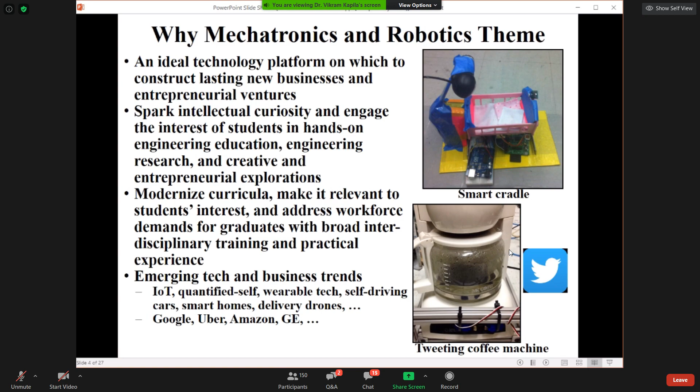It can address the demand for a workforce that produces graduates with broad interdisciplinary education and practical experiences. And then obviously there are numerous emerging trends, maker spaces that are becoming commonplace in all kinds of businesses that see the potential for mechatronics and robotics.

So in response, within the last 4 years, starting in about 2016, we have created a new master's in mechatronics and robotics that has 4 foundational courses in mechatronics, robotics, and software tools. It also includes a course in entrepreneurship. Additionally, students can specialize either in robot mobility or in medical robotics. We have not yet done the micro robotics option, although that is in the curriculum.

And then there is a thriving ecosystem that we have built to support projects and theses for students. And hot off the press is our brand new undergraduate interdisciplinary minor in robotics that our 4 recent robotics hires have created that is going to be offered starting in fall of 2020.

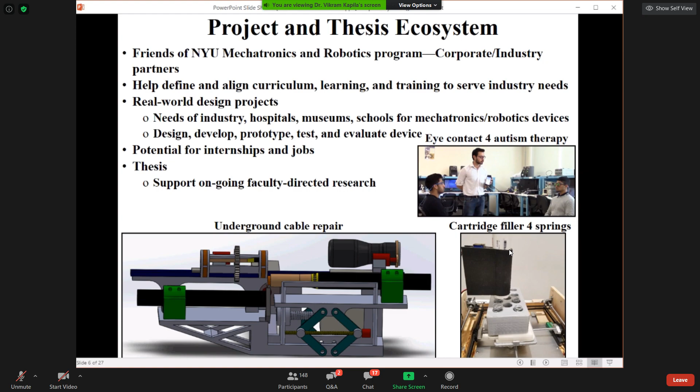So we have a very thriving project ecosystem where companies can come in, partner with us through the Friends of NYU Mechatronics and Robotics program to shape the curriculum, provide internships and jobs for these graduates.

Now let me discuss a little bit about our work on natural and intuitive human-robot interaction with mobile devices. There are two main methods that we utilize to create these HRI techniques. In one approach, the smartphone could be mounted on the test bed, whereas in the second approach, the smartphone or tablet could be held in the user's hand.

To render these novel human-robot interaction solutions, we adopt research results from varied domains, including user interaction research, machine vision research, 3D graphics, as well as estimation and control, to develop solutions for a variety of problems.

We have applied these techniques to develop highly interactive lab explorations for automatic control and mechatronics. Some of these setups could be controlled locally with students present in the lab, creating a highly enriching learning environment. But in others, the test beds could be accessed remotely, and we have published extensively in this area.

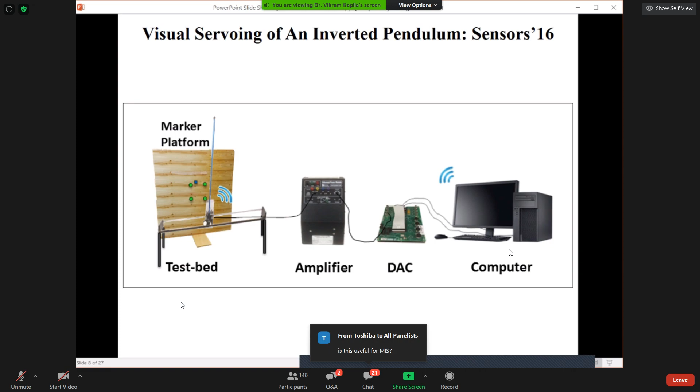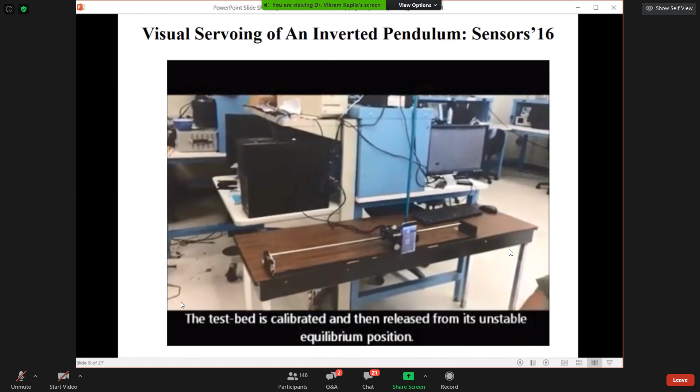So the smartphone is embedded here on the inverted pendulum test bed. All of the sensors on the pendulum test bed are not being used. Instead, we are simply using visual servoing with the smartphone and implementing the control algorithm directly on the smartphone to be able to control the inverted pendulum vertically upright.

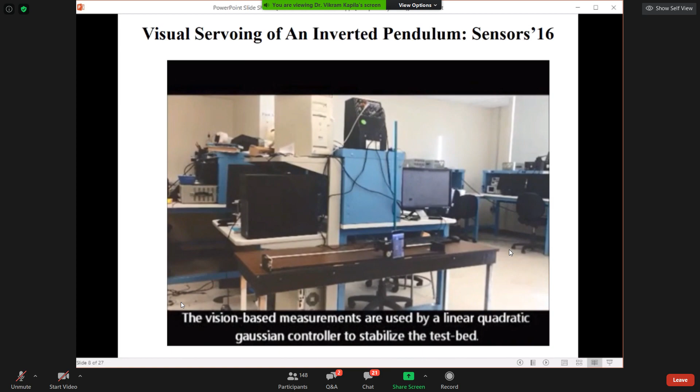So now let me transition to our more recent work that is looking at convergence research. I'm going to discuss some of this work that we have done over the last 4 years. It's mostly driven by the realization that our world is witnessing several frontier technologies that are evolving at a rapid pace.

There are several novel drivers in the current tech ecosystem that render these frontier technologies to the level of being considered as disruptive technology. Finally, I'll also look at some of the ongoing research at the convergence of frontier technology in my lab.

Industries that are having difficulties filling jobs with human workers are increasingly deploying robotics to stay competitive. Hirebotics is one such company. I read about them only about 2 years ago in a Washington Post article, and a few months later, one of my students was hired by them. Essentially, it's a robot staffing company that you can call in to deploy robots for an industrial problem without having to pay for the robot. Instead, the robot is essentially being paid for on an hourly basis.

Similarly, artificial intelligence is being deployed extensively now for applications such as policing, mortgage application processing, social media campaigns, and autonomous driving. AI and computer vision are becoming extremely common in a wide variety of applications.

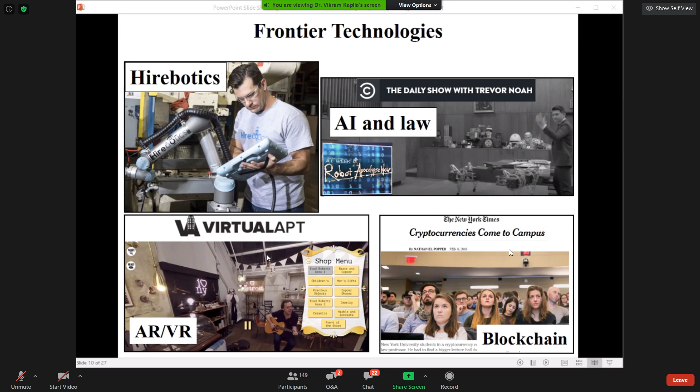Blockchain technology similarly has pretty broad applications beyond serving as a distributed, decentralized, secure contract for cryptocurrency, and we have been using this in recent years for swarm robotic applications in our lab.

So the drivers for disruptive technology emerge from the fact that there have been advances in tech frontiers in recent years that have allowed a number of these hardware and software technologies to be democratized, so that access to hardware, software, as well as knowledge has become very commonplace.

What used to require maybe 20 years ago tens or hundreds of thousands of dollars to do new development in the robotics field now could be done in one's garage with basically hardware and software all acquired off the shelf for hundreds or perhaps low thousands of dollars.

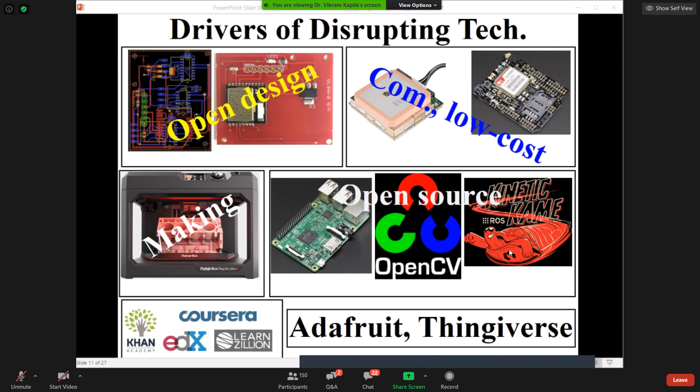And then there has been an evolving culture of making, inventing, and startups that is adding more fuel to propel this disruption rapidly. So now let me look at a couple of these examples from my lab, specifically robotics, AI, augmented and virtual reality, and blockchain.

Many of these technologies are converging together, and their greatest applications are going to come from interactions amongst them instead of in their silos. So in our lab, we are exploring some of these technologies and how their integration can be beneficial.

For example, how you might be able to integrate AR and VR with robotics, and how you might be able to use blockchain in swarm robotics to do secure messaging and communication across multiple entities.

In the interest of time, I'm going to focus primarily on augmented reality for human-robot interaction, where our goal is to create a highly effective intermediary between robots and humans so that they can exchange information and allow novice users to interact with robots in a shared space without requiring any specialized training.

In one such scenario, humans can inform robots in a natural and intuitive manner that results in the desired motion of the robot and allows its end effector to reach a desired target. Moreover, the robot can convey requisite information to the user, for example, the workspace boundary in which the robot can operate.

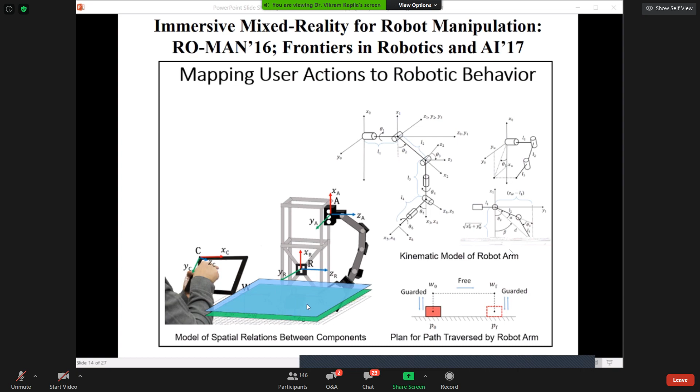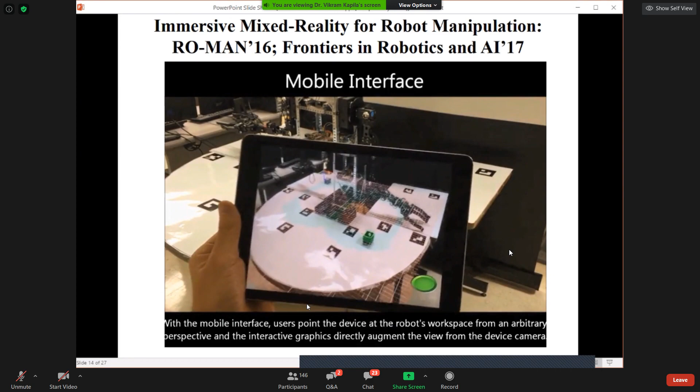In this first setup, the video that I'm going to play, you are going to see a robot manipulator that is going to be controlled through a tablet-based interface. The user is holding this tablet with a user interface already loaded on it, and then the objects and the environment have a number of fiducial markers installed on them.

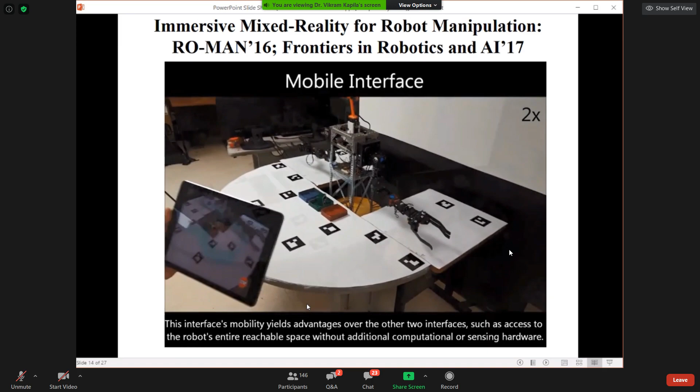The human user is able to move around freely in the environment and interact with the environment and the user through the UI to command the robot to pick and place various objects. The tablet camera is being used to sense the environment.

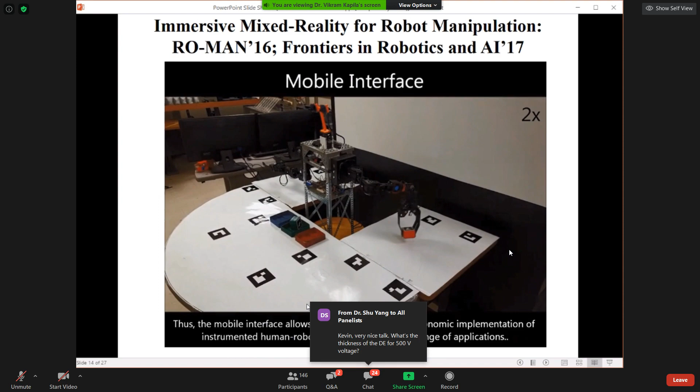Fiducial markers are the ones that are being used to locate the objects, and then there are homography algorithms running in the background to allow the robot and the objects to be located in the environment.

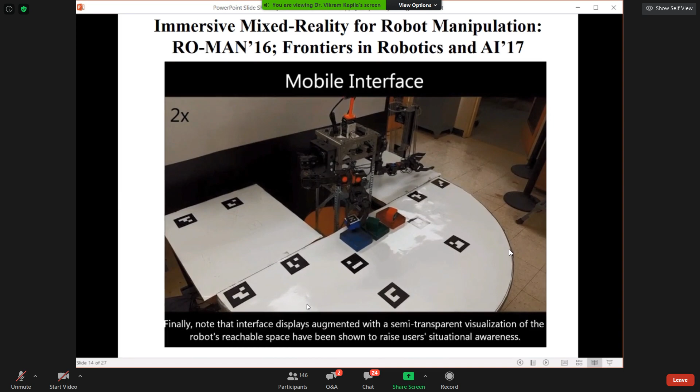This is about 4-year-old work, and you will see the progression of this work as to how we will be able to remove a lot of these fiducial markers from the environment and still be able to interact with the robot and the environment. So in this next piece of work, we are moving away from one manipulator robot.

Instead, we're working with a number of mobile robots in the environment that can all be interacted with and commanded through the tablet.

Once again, you will see in the video that we are using fiducial markers that are placed on the robots as well as on the objects. But now, at any given instance, only one fiducial marker affixed object has to be stationary, and that object can change from moment to moment, and that is where momentarily we affix a coordinate frame.

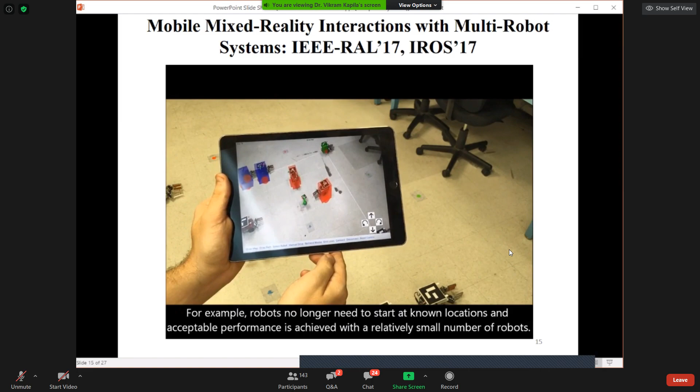A lot of the other information for the homography comes from measuring the sensor information from the tablet itself, the IMU of the tablet, and multiple robots could be interacting with the objects through that single tablet. You don't need to put any cameras in the environment. You don't need to put any sensors. The environment is not prepped up.

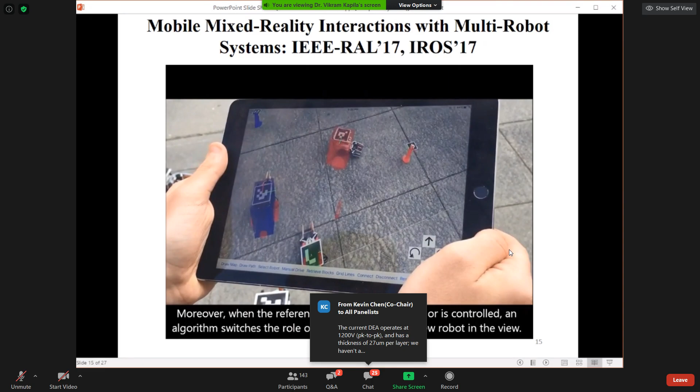So now all these robots and objects have been brought outdoors, and just with the tablet, you're able to locate, visualize, and interact with these objects. But once again, like the previous video you saw, all the objects and the robots here do have to have the fiducial marker.

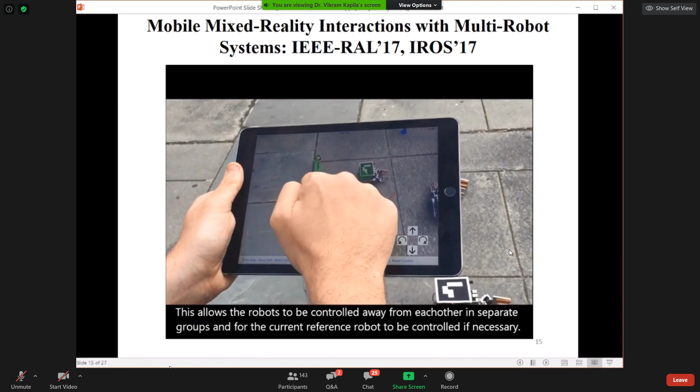So now let's start relaxing some of these assumptions that we had previously. In this new framework, what we are going to do is marry the marker-based technique that you saw previously, but instead of having numerous markers on the environment, objects, or the robot, in this new scenario, there would be a single fiducial marker that will be placed in the vicinity of the robot to localize that robot.

And then beyond that, we will be using markerless approaches that will allow us to determine patterns that belong to individual surfaces so that we are able to locate the surface of operation where the robot is going to be picking and placing the objects.

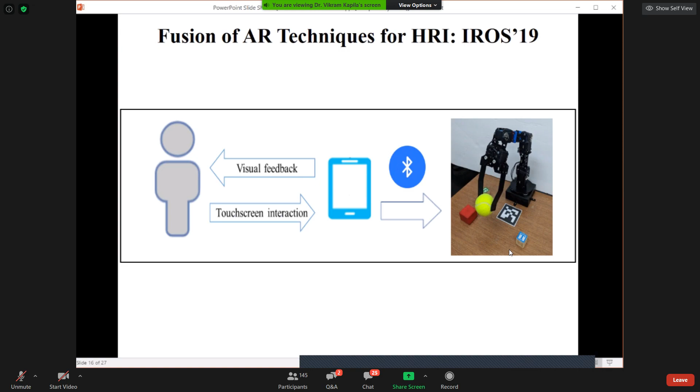Using ray casting methods, objects are located through user interaction on the screen, both for pickup and placement. The human user holds a smartphone through which they locate the fiducial marker where the coordinate frame is located. As the user moves around using the IMU on the smartphone, the coordinate frame affixed to the fiducial marker is recalled, and the user drops anchors based on where the interaction needs to be done, as you will see in this video.

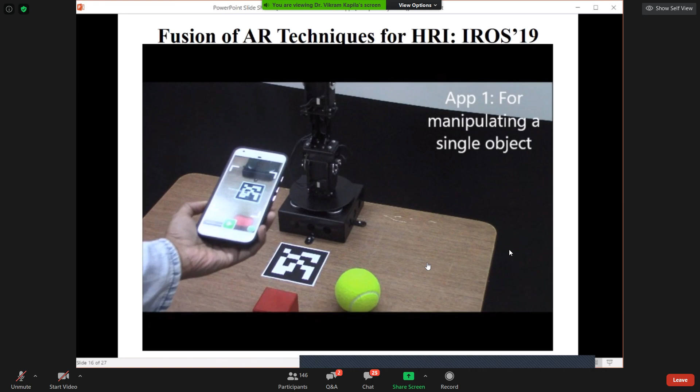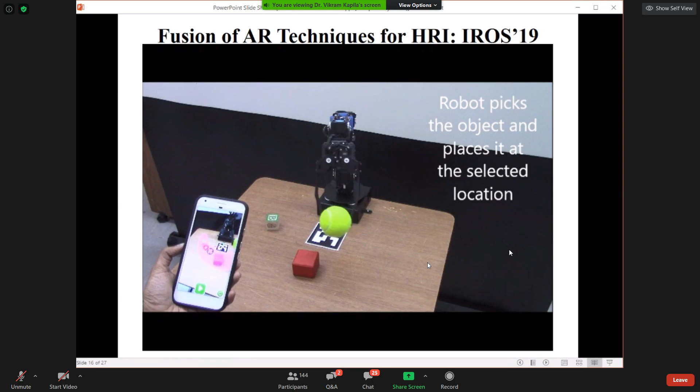The user first places the origin on the fiducial marker, then puts anchors at the objects that need to be picked up and placed at various locations. The sizes of the objects are not known. The manipulator robot opens up completely, picks up the object, and places it at another location. So a lot of things still need to be done.

Now we move on to the next setup, where we extend the previous user interaction. Through an interactive approach using augmented reality objects, the user is able to tell the robot where to pick and place an object from, an object not previously seen. Through this virtual interaction, the user is also able to communicate the size of the object to the robot, as well as the pose in which it needs to be grasped and placed. All of this is done through the virtual interaction.

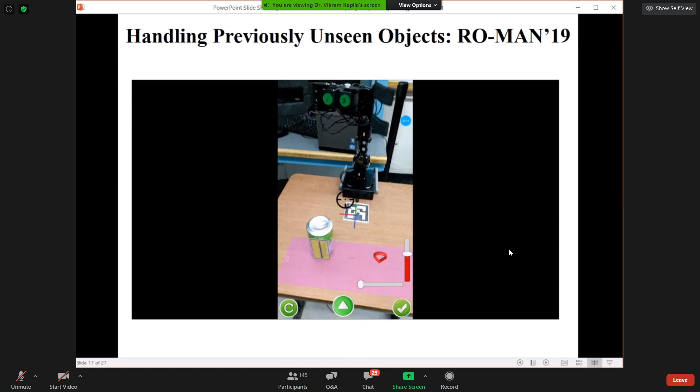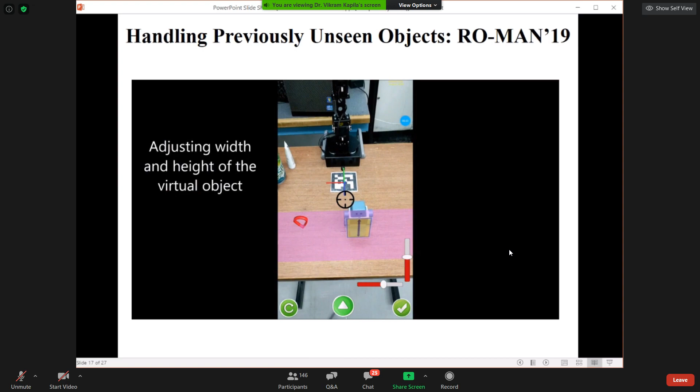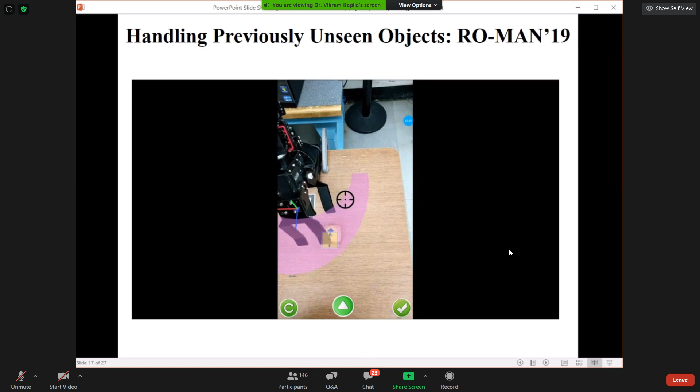As you will see, the user is putting in a virtual object that tells how tall the object is. The user is able to tell the pose in which the object needs to be grasped, as you will see momentarily. Now the user is rotating that AR element to indicate in what orientation to pick and place the object, and so on. So we show that we can get the object size, the pose, the height, and so on.

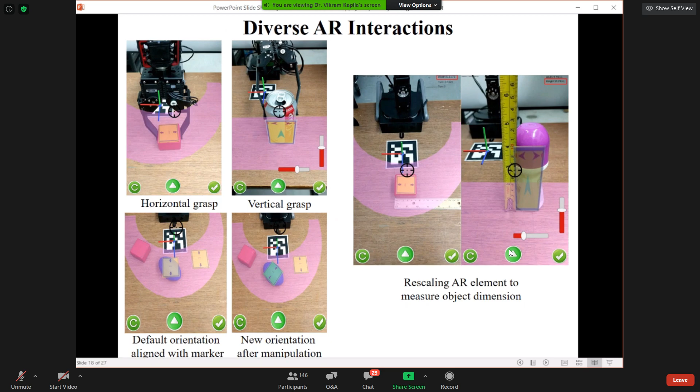We do a lot of user studies with these applications.

Next we move on to pick and place operations in a scenario where a user needs to teach a robot to follow a certain path, for example for machining, welding, or spray painting. Something like this might be useful in a flexible manufacturing operation, so that you don't need the robot available for teaching it what to do. The approach is highly user-friendly, where the operator does not need prior training in terms of how to work with that robot.

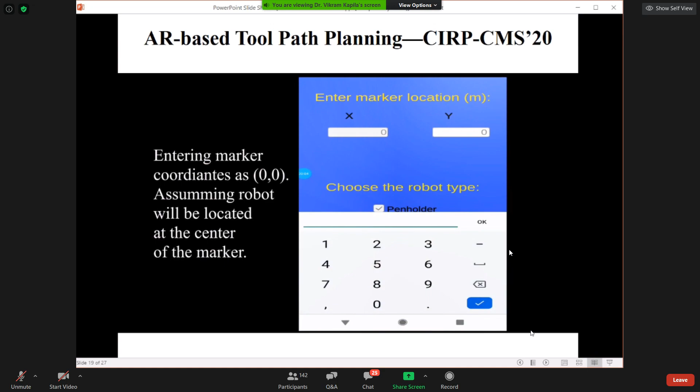First you select some marker location. Let's say the marker is placed right by the robot, so we select it as (0,0). We select the type of manipulator, whether it is holding a pen or a gripper. We set the origin and drop a bunch of virtual points we want the robot to traverse through. We select a particular type of manipulator and its pose, as you will see momentarily. Then we run the entire operation first virtually in this AR environment to ensure the robot follows all of the instructions. Then by click of one button, the entire operation could be transferred to a real robot.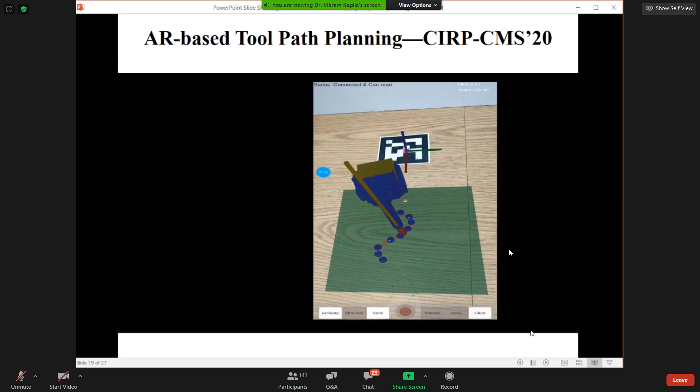Then we also do a MATLAB simulation to check the accuracy. Eventually you can download the entire operation to a real robot, as you will see now momentarily.

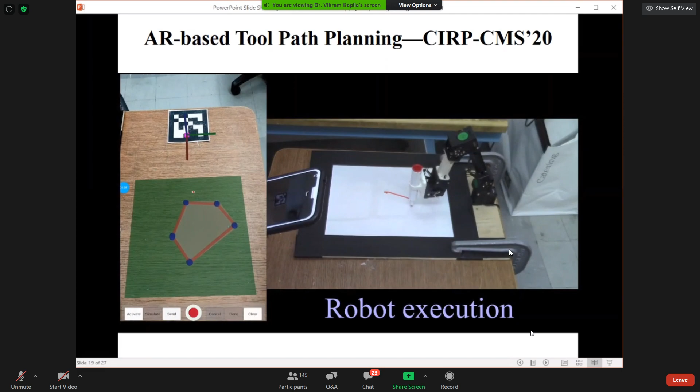Once again, we do extensive user testing, including the NASA task load index, to figure out whether users find these approaches to be mentally, cognitively, or physically burdensome. Now you can see that in one click, the real robot is able to perform the task that was taught offline.

So now we move on next to teach in a similar manner the approach where you can develop an augmented reality spatial referencing system, allowing a non-expert user to tag specific locations in a physical environment, and then a real robot could be commanded to go to those locations.

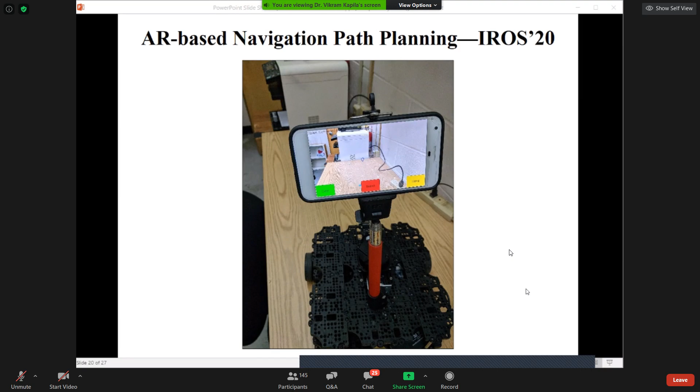And then we have integrated Alexa so that the user can command by word or spoken commands to send the robot to those locations.

In the interest of time, I'm going to skip this video and move on to show some other examples where we are now moving on to applying some of this to healthcare.

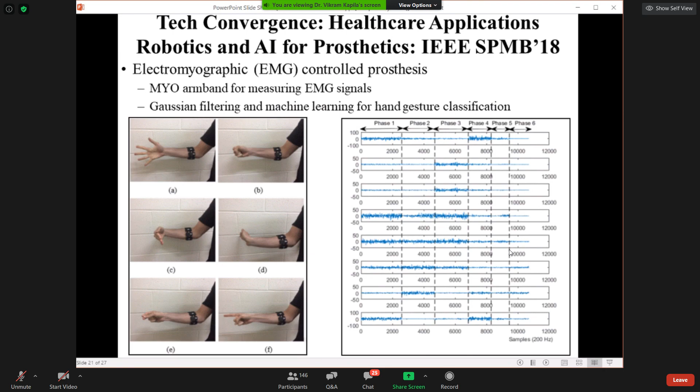Here we are using a Myo armband to measure EMG signals to detect human hand gestures by implementing Gaussian filtering as well as machine learning algorithms, testing a variety of different algorithms to find out which one is most efficient.

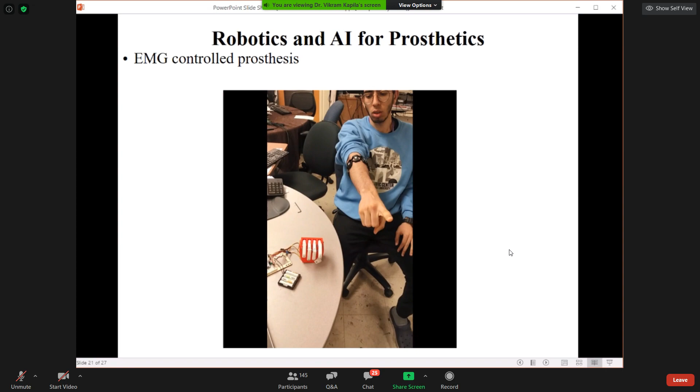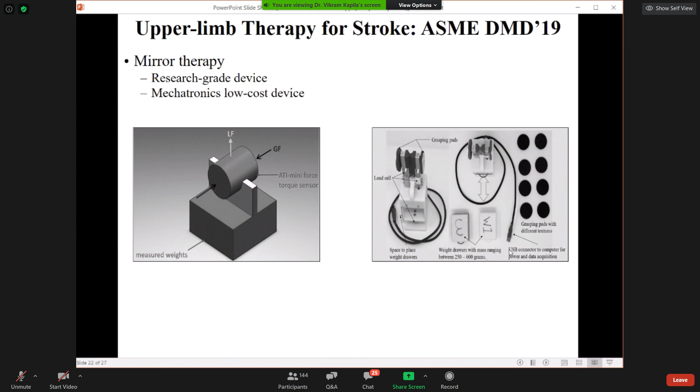So that you can measure in real time human gesture and command a prosthetic robot to mimic those same gestures. Next, we have developed, using off-the-shelf electronics and microcontrollers, mirror therapy devices for stroke rehabilitation for grasping, and integrated that with gaming-based interfaces so users can utilize these devices at home for local rehabilitation.

Extending that work to measurement and allowing patients to do rehabilitation for their arm motion and range of motion, we have developed wearable inertial sensors that a user can wear on their arms as well as on the back to measure range of motion using quaternion-based measurements.

This avoids any singularities, and we convert these measurements to a framework where physicians and therapists are able to understand them using what is known as a joint coordinate system.

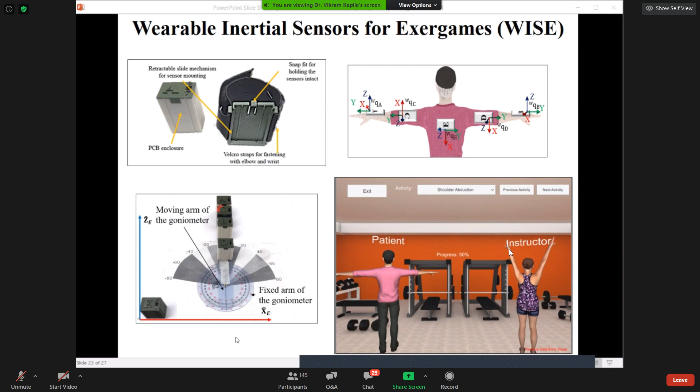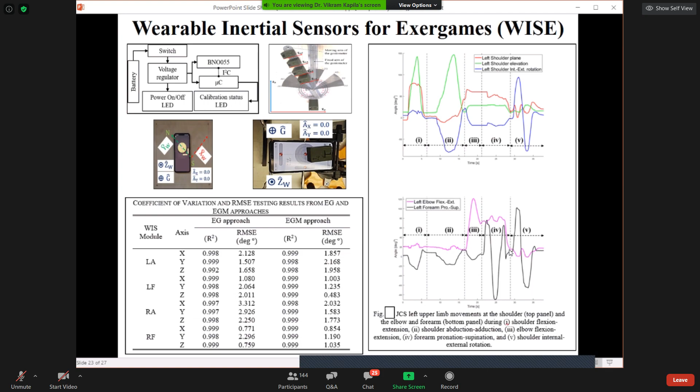We have done comparisons of these measurements using goniometers, done the conversion to joint coordinate based measurement, as well as comparisons using Kinect sensors to validate that these sensors will provide the desired measurement.

And using a wearable fabric-based conductive sensor, we have created a very low-cost measurement device that can be used by therapists monitoring lymphedema therapy, so patients can do their therapy remotely at home twice a day without having to come to the clinic.

We have integrated that and shown it works comparing measurement via Kinect versus our wearable sensor, along with a microphone, so you can synchronize the therapy not only for range of motion measurement but also breathing, inhalation and exhalation, all integrated for remote monitoring of patients.

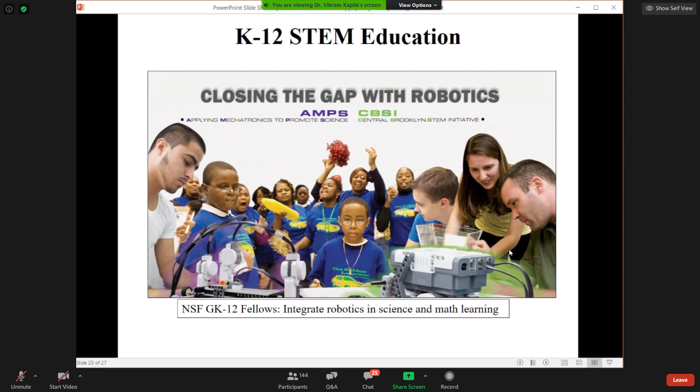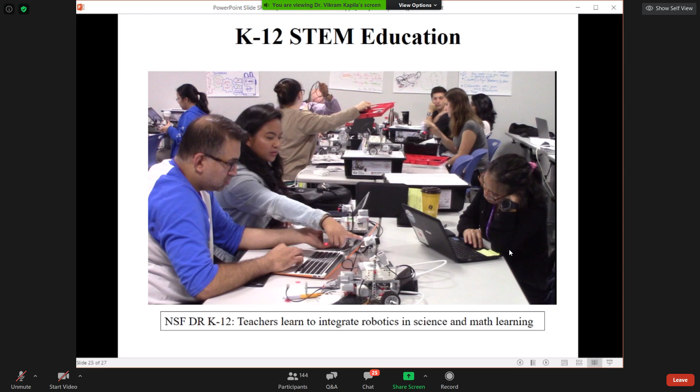We bring much of this work not only to our own students at the undergraduate and graduate level, but also to K through 12 STEM education, bringing these technologies into the classroom, working with teachers, bringing in industry sponsors to conduct workshops for New York City teachers and educators, having teachers learn and develop lessons aligned with national standards, implementing them in the classroom, and sometimes having teachers and students collaborate together.

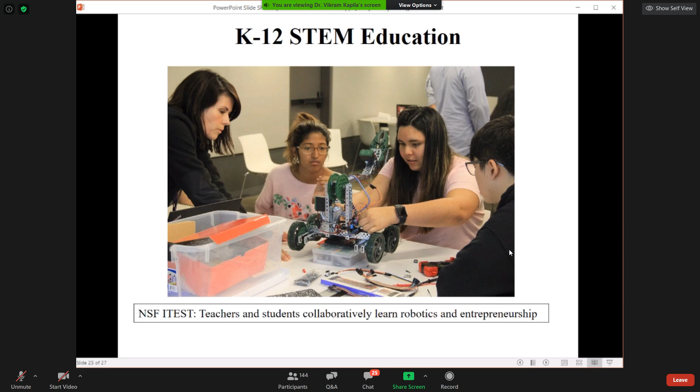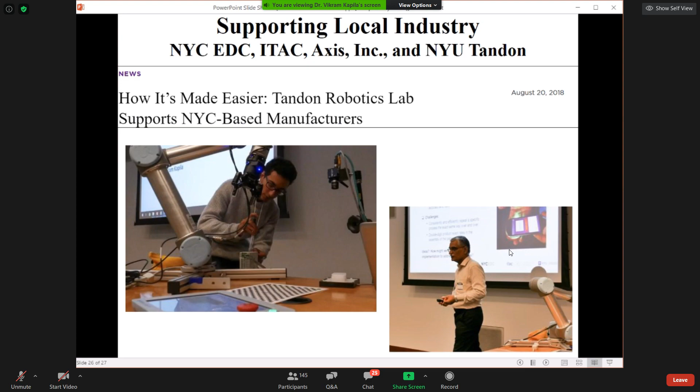Beyond that, we have also done workshops for local industry on how they can bring robotics to their own workplaces, because the future of work is increasingly going to be governed by integration of these smart devices and tools into the workforce. I finally want to thank our sponsors, students, postdocs, and collaborators who have contributed much to our education and research effort.

And with that, I'll stop and take any questions.

Hi, Dr. Kapila, very inspiring talk. I think there's one question from the audience. He asked about, do you have some ideas how to integrate soft robots with education, either through online education or in-person education?

Much of the work that we have done in the area of mechatronics and robotics is mostly on campus, in person, because of the need for hardware integration and access to maker spaces. But I see very easily how soft robotics could be integrated on campus-based education.

I teach a graduate course in robots for disability, and oftentimes students do projects that involve the use of soft robots, whether it is soft actuators or wearable conductive material. I have students developing solutions for sensory trick for dystonia, or inflatable robots that can be used for stroke rehabilitation.